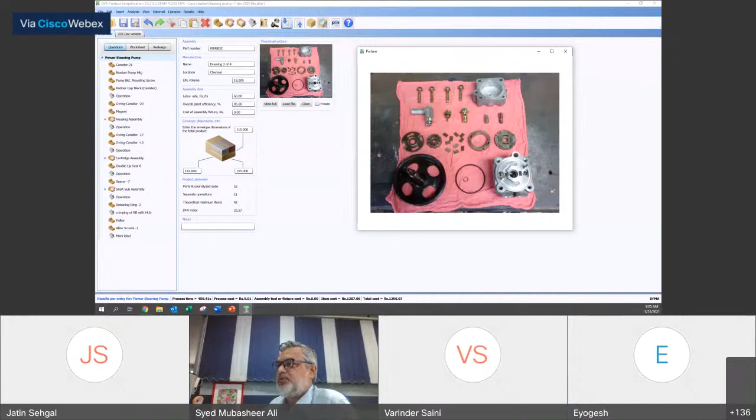This is something you could also do with the DFA tool. You could do it in an assembly sequence, and you can also do the disassembly sequence.

You would do disassembly when your challenge is, how should I service this product in the field? How should an engineer or service engineer disassemble and address a maintenance, warranty, or service problem.

During assembly in a factory, the tools, tackles, procedures, and steps may not be the same way a field engineer, mechanic, or technician would do it, and he may not have the same kind of tools to reorganize parts when he wants to disassemble and repair them. So you can use DFA to address both of these attributes.

This is option one I want to show you as part of the recap. Second thing I want to show you is, let's say if you had just a drawing...

Now, this is what I showed you earlier was a mechanical component. This is an electromechanical component. It's got sheet metal parts, a PCB, wire harness, plastic components, and so with a 2D drawing like this, you could also do a very decent DFA analysis.

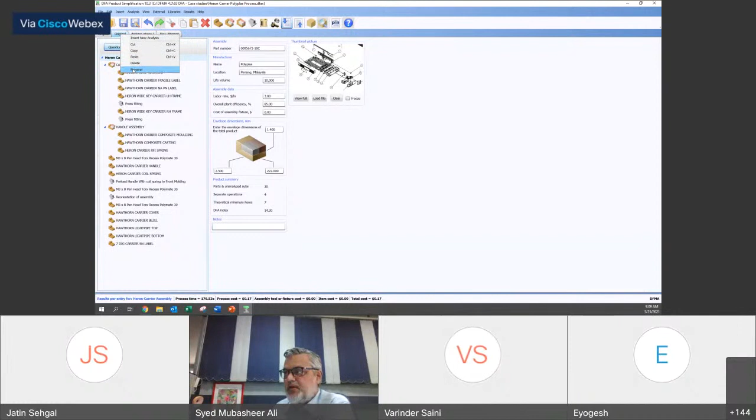I'll just do that in a minute. I'm going to make a copy of this, paste it, rename it, and call it original-dash-Ashwin idea. Maybe there's a possibility instead of having this as screws, we can rename this. I'm just doing my idea creation here. I'll double click this and say I'll make it an M3 size snap fit. I don't know whether it's a suitable thing, so I'm not going to have it as a threaded fastener. Maybe I'll do a snap fit operation with 3 snaps.

It's in my imagination now, but I do not know what the impact of this is. So I can do this impact analysis by going here, and I'll look at this process time. I'm just going to take the original and the Ashwin idea which I just created and look at them. Sorry, I need to regenerate the file. Dash 25 May 2021, saving this.

Okay, let me go and look at that. So what I'm trying to tell you is, on its own, it does not recommend iterations. It gives you feedback of your design intent.

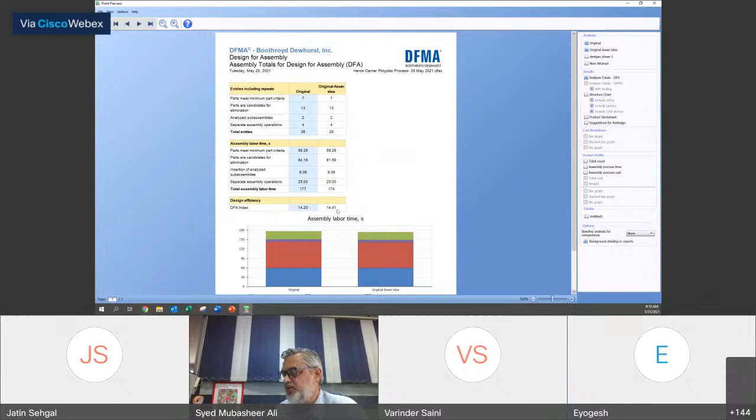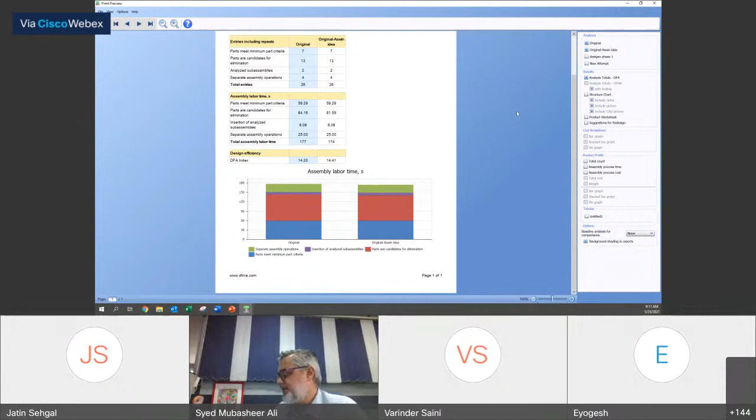Here, as you see, the impact of the old to the new, this is going to be your change of design iteration. So 177 seconds is going to be probably 174, and my design index is going to change up so slightly. What I just did here was, instead of a screw, I changed it to a snap fit design. So I can get rapid feedback of intent like this, which is what we could probably do.

Okay, two more questions before I go on to the session. Hang on, improvement - how can you do 2D drawing like that, sir?

With software? No. This 2D drawing image is just an image of the product. This will also be a drawing, but it does not read from the drawing. I'm just using this drawing as a reference of saying what file this product is. This doesn't read from a 2D drawing.

Sir, I have one question - what is the difference between disassembly order and assembly order? I think I already explained that. This assembly order is more on the factory level, which may be having more good tools. Disassembly order would probably involve having a full product where a subassembly is inside the product.

Imagine like a car is already available at the mechanic shop. He wants to access, say, the alternator. The access for the mechanic to the alternator in a disassembly is a disassembly sequence. He has to open the bonnet, then keep the bonnet locked in a standing position. He has to remove probably the front grill, then go and reach access. This is not the same sequence of the assembly when the product is built in the shop floor in the factory. So the challenges in a disassembly sequencing or removal of an item to reach it may be different than assembly sequencing of the same product when the product is built. I hope that answers your question, Mayank.

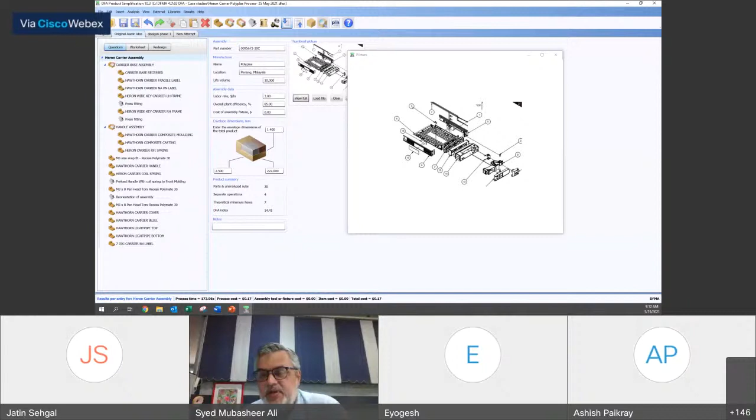Can we export component specification from other software? Yeah, I will show you that if time permits. Here we have an opportunity, like I said yesterday, that we can import bill of materials.

So you can import the bill of materials in a text or CSV format. I can even import Excel formats like you can see here, and we can also do text formats. We can probably give you content as a training manual which will probably have this information.

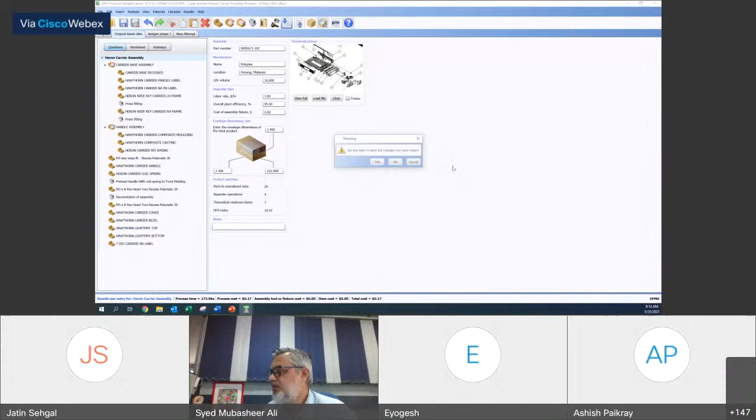And no. So just let me know if you can see my screen.

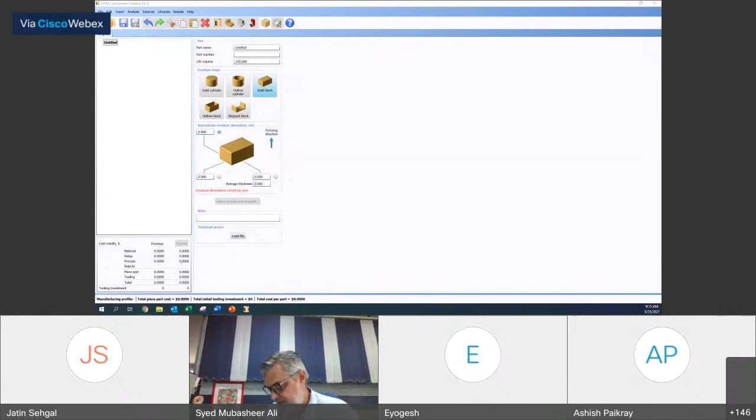If you have multiple systems, you can probably do this simultaneously, or if not, please watch my screen so we can learn from this, and then you have the PDF documents on this exercise. You could probably take it from there.

Okay, now I'm going to analyze one of our motor parts, which is this guy, this base part, as a component for casting.

Okay, so I'm going to give it a name. I'm going to do two approaches. One is I'm going to start out this exercise as if I have only a concept and do a quick analysis. Then I will take up a CAD model. Is that okay with you guys? So that I can show you both aspects of how to use this tool.

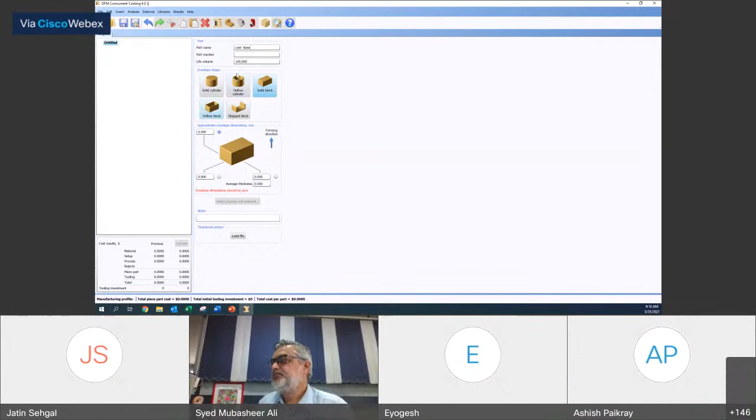So I call this the cast base part - sorry, base part - and that's the name. And the life volume, I just want to make a few hundred pieces. That's my objective.

Now, generally, the DFM tool is designed so that anybody from the conceptual stage design can be able to get estimates right up to the production engineer who may have accurate inputs which he can give to build his cost model. This software graphics user interface is designed with that in mind.

So just like we are in DFA, we give an overall geometry of our part as cuboidal or cylindrical. You can start out a DFM analysis by saying what is the approximate envelope shape that your component occupies. See my screen? What is the maximum dimension, and is it a hollow component or a solid component? This helps to do some internal calculations.

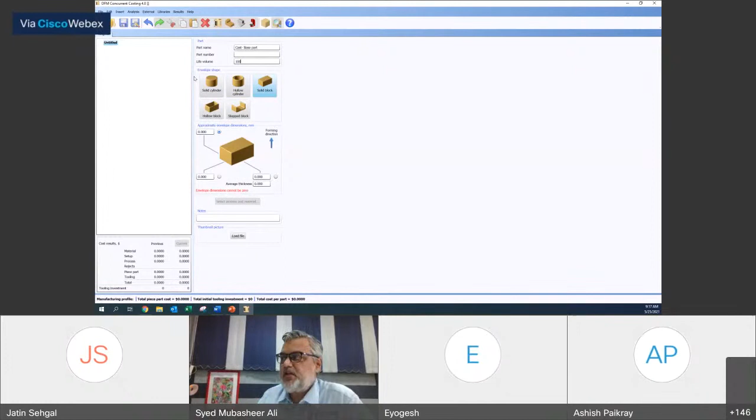Even if you don't have engineered data about your idea of the part, you can still get good cost estimates when you're doing conceptual work. Do you understand what I said? If you do, say yes. If not, you can ask for clarification, and I can get ahead to answer them. Great, thank you so much.

So I'm looking at my part, and I'm going to refer to this part again. Guys, do you have the dimensions of this part in the PDF, so I can use it for reference?

Just give me a second. Just opening up.

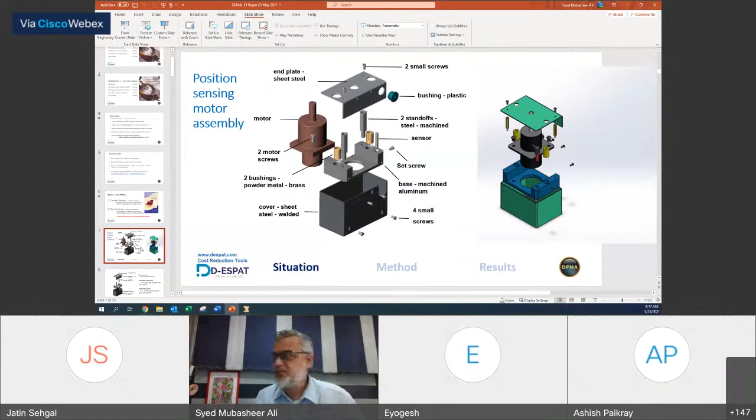Okay, I'll just take an estimate here from the CAD model. I'll come back to this.

So I'm going to assume the value for this base part. I'll say it is 25 mm height, about 70 mm wide, and about 100 mm width, and about 3 mm in thickness. I'm doing this at a conceptual level, and I start out with three important inputs in this first window: one is the life volume, your choice of envelope shape that closely defines what your component's final geometry is like - the geometry of your part - and an average thickness of that part.

I select the process and material selection window. This will come up. Now I can choose what I want as the particular process that I'm intending to make this with, and what will come up is these two choices on the right hand side.

Of course, your software will not have the Greaves project - you will have North America and China database. Now, why do we have this? This is a database that has been standardized over the last 3 decades. Where customers deploy this, they use this database and build their own customized, localized database for their own activity. We'll talk about that in a minute, but right now you could probably refer the default that you may have. Don't worry about these projects, Himanshu, that's my private projects - it somehow got copied here in my presentation laptop also.

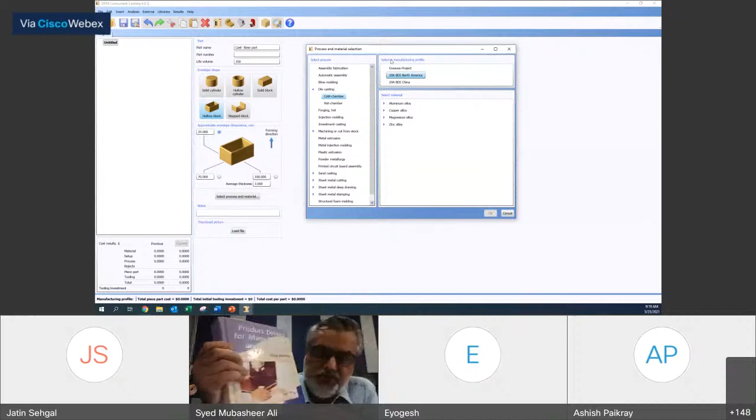BDI means Boothroyd Dewhurst Incorporation. BDI are the people - that's Dr. Geoffrey Boothroyd and Dr. Peter Dewhurst, the two folks who started this concept of measuring cost at the design stage. They are from the University of Rhode Island, and they started this measurement technique in the 1970s to help automotive and aerospace businesses measure cost at the design stage.

Today we have it in the form of a computing tool. This tool is over 36 years old, so that amount of database has been documented and standardized in our software. It's the number one methodology used by Fortune 1000 companies.

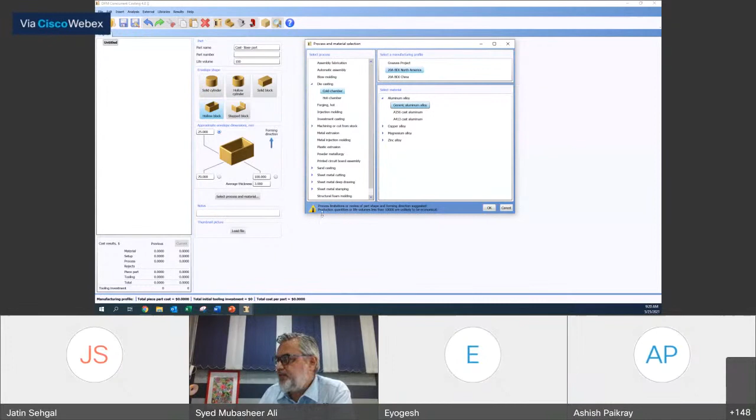Thank you, Janaki. So, die casting operation - let me select a material. When you make a selection that has certain limitations from a manufacturing perspective, it will give you recommendations, like here: you have selected production quantities less than 10,000, which is most likely to be uneconomical. That's okay, maybe I want to do an academic analysis here, so I'll say okay.

And what has come up now, ladies and gentlemen, is the overview of the process related to the combination you have selected. For a given geometry, you selected a process of casting and a material. What comes up below from the software automatically is this data - the process related parameters, the process machine that can be utilized for an operation like this. These are the list of machines right now, but it has selected the most ideal machine.

What the software will do when you give a geometry for carrying out a costing analysis or a manufacturing review analysis is it will go and pick up the most ideal machine. Why does it do that? Because this automatic selection is always on in our tool. Unless you don't want it, you can unclick this and probably select another machine.

For example, right now I can go and say change the machine. It will bring up all the die casting machines listed in our library. I can go and select some other machine. When will I do this? I will do this when, maybe in our lab, I don't have such a small machine - maybe the smallest machine I have is some other tonnage. Then I can click on that and use it.

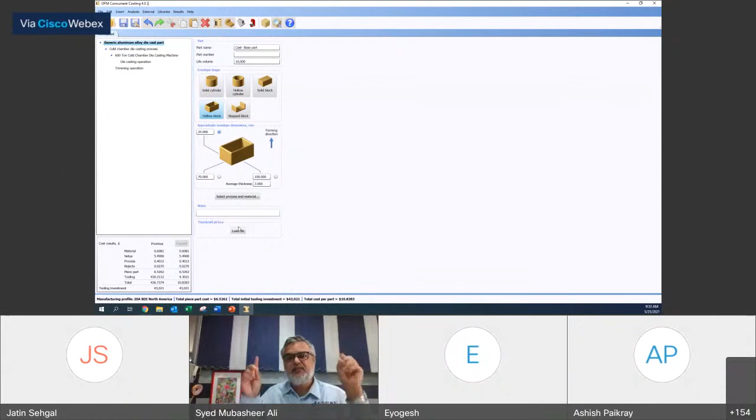So this impact of playing different what-if scenarios is what you can do with the tool. Do you get it? If you get it, say yes in the chat box. Okay, so use this tool. You know, gentlemen, what I'm giving you today, what I'm showing you today, is something.

If I was in an industry and had to work with a manufacturing expert, it would be very cumbersome to do these kinds of calculations, because he would probably be using some method or Excel sheet that only he is familiar with. Right now, we're doing all of this using a tool that has a standardized approach to solving such scenarios.

The next thing that would impact this is something called part geometry. Have a look at this part. Yes, we can do it virtually. Imagine this part - it's something like this. This side is 70, this side is 100. Just remember this.

Now I go to this part projected area. Are you able to see my video? If you can see it, say yes on the chat box. Now imagine this part - I'll come and show you this in the CAD model later. If I want to make this component, I'm going to ask you ABC.

This is surface A. Is this a good way to manufacture it? Or should it be manufactured like this? Or this way? What do you think - will it be A, the longer side B, or the shorter side C? A, right? Because this is a larger area, so it's easy to have molding along this axis, along this face.

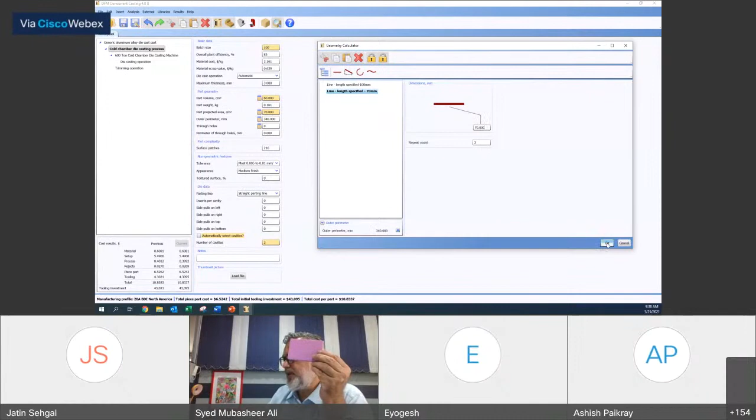Similarly, I have another one on the left hand side, the 70 mm. These are names that I'm giving in the file so it's easy for you to follow me. So that's a 70 mm line segment, and there are 2 such line segments. I'll say OK, and it comes into my software. Did you follow this so far?

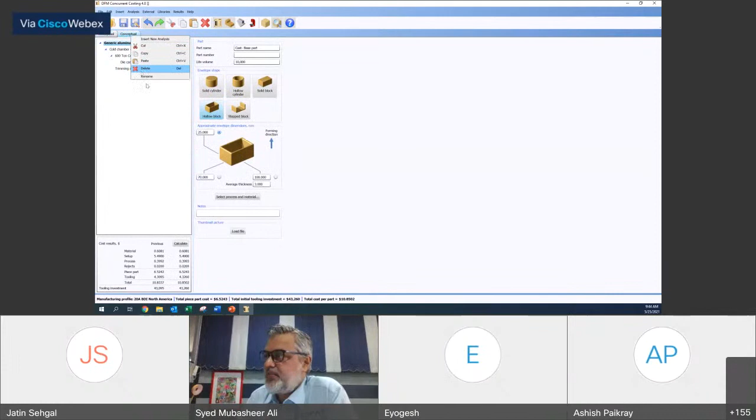Now this is a default setting from the database. I'm going to do this copy, paste it, and rename it as IIT Ropar for a minute.

What I'm saying here is at IIT Ropar, our labor rate or machine rate is not $60. If you know the labor rate or machine rate of the machine in your factory or college, you can go and build that. It is not $30 an hour in India; it's less than $2 an hour for skilled labor in India.

So when I do something like this, I can see how it impacts and adds up to the cost. If I make this using the US database, this was my cost impact. Because I changed the machine rate and the labor rate, you see the material hasn't changed, but the setup cost and process cost are slightly lesser because of my new labor rate, and this is my proposed new cost.

So if somebody says you have to work on a project and there's so much data to get, don't worry, get your idea of how you want to make your product, then go and build the details that you know about your enterprise.

Machine cost includes depreciation. So here's what I'll do to show you. Let me make another copy of this, paste it, rename it, and call it depreciation.

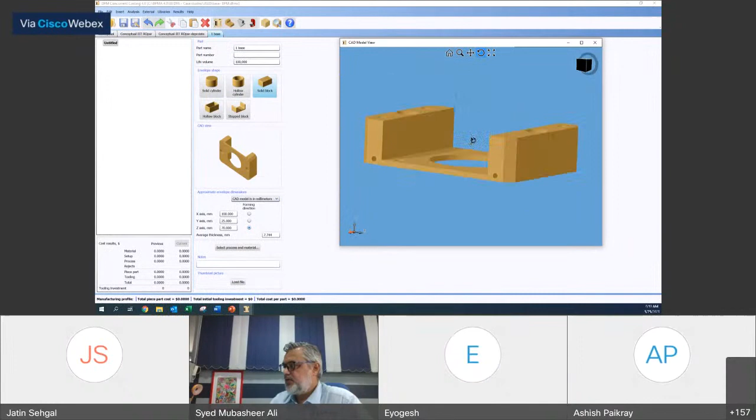I hope you pay close attention to what I'm showing here. We're going to talk about these. So this is my CAD model in an STP format, which I've imported here. Now I have a question for you guys: can you see the coordinates at the bottom, X, Y, Z? Which do you think is a good way to cast this component - in the direction of X, Y, or Z?

Y, correct. So this is more feasible from a casting perspective than compared to the other two directions.

So what I'm going to do is when I import a CAD model, watch this - the CAD model's overview geometry automatically comes into the software. What you do have to do as a choice is select the envelope shape that closely represents your geometry. Watch this, you see here forming direction. If I select a hollow, I get a principal axis. If it's a solid, I don't get a principal axis. So this is a choice which the software will come up with. Make sure you're having the right choice made depending on the geometry that you have selected.

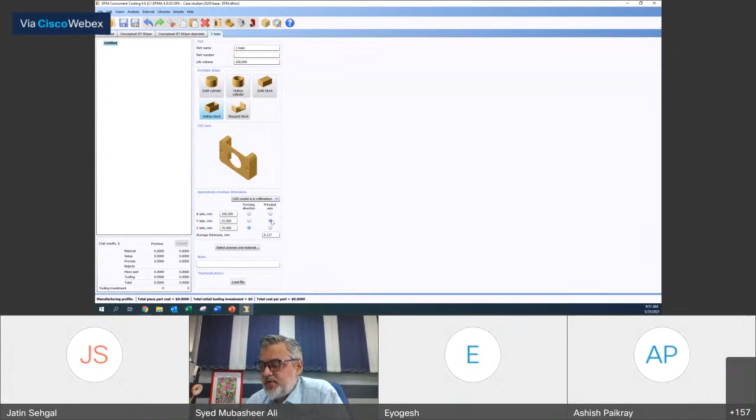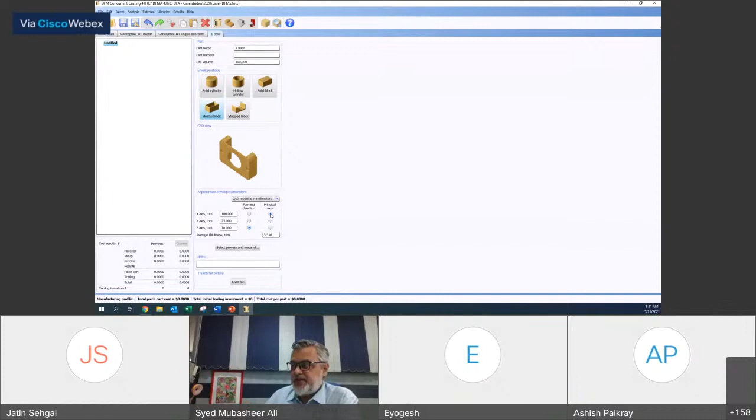Now, another thing I'd like to point out is as I select the direction of forming, I want you to watch the average thickness. Now where are these numbers coming from? This number is coming from the CAD model whose data has been transferred into the DFM tool through this STP viewer software. So in the direction of Y, the software is able to measure an average thickness of 6 mm. In the direction of Z, it's about 5.7 mm. In the direction of X, it is about 5.5 mm. Nevertheless, our direction of forming is going to be Y, and in this case the axis of forming also is going to be Y.

Now, when I do a CAD import, this is what I should take care of: quantity, and the right envelope shape that closely defines my part. This is your actual part. We are a component centric tool, you're a product centric tool. Here, you don't give the geometry of the part - you give the final geometry of the part. That's what you give here, and that's what has come out here also.

Now I select the process and material. Now I select the same process for the same geometry, and say OK. The only difference between my previous one and here is a few things. One, if you remember, white color means default, yellow color means the user is giving information. But if you go to the CAD model generated, orange color will come there, which means the data has come from the CAD software.

All right, let me take a minute and answer some questions from the chat box. Is there any limitation in the CAD software, or can we import it from any other software? As long as it is STL, STP, IGS format, you can import - step block would do too. You can explore whatever you want, Abhi. Can you import CAD files? Yes, Mridula, that's what I just now showed you.

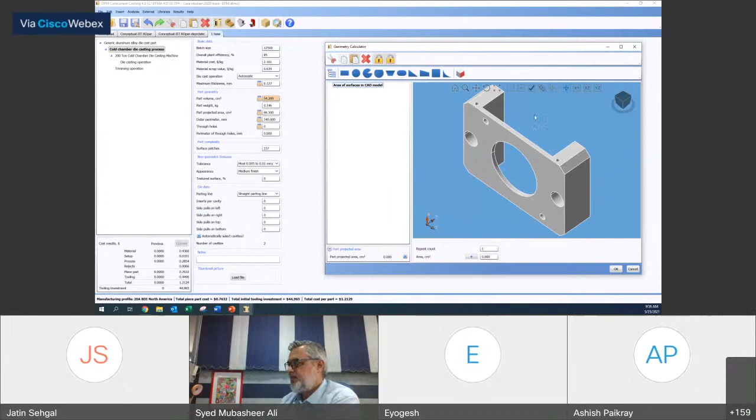Right now, what I want to do is find out what is the projected area in the direction of forming. You all told me that y is the direction of forming, right? Y or negative y is the direction of forming. Correct or not?

What I can do is put this face up, and if I go and select this geometry, the face of that area is calculated. I can bring that into my analysis like this. So this is my new copy, and if you see, it is showing orange color, which means the software has picked up this value from the CAD software, and I'm making my prediction a little more accurate. So what was $1.21 is about $1.18 now.

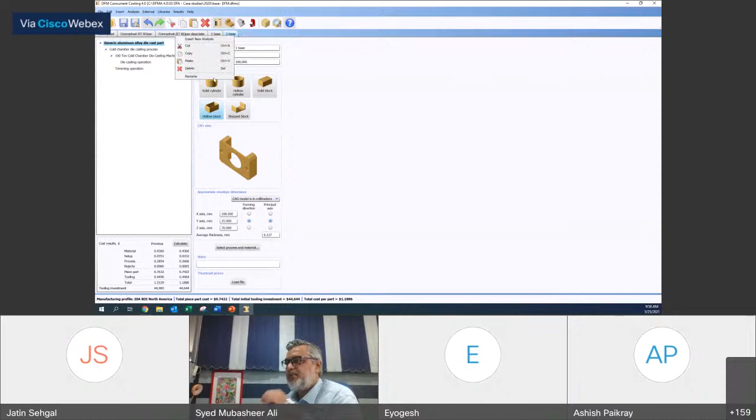Let me make a copy, paste it, and rename it as maybe improvement, so I have multiple files showing the same thing. Again, for perimeter, like you said, you wanted to capture the fillets and other features. I can use this geometry, build the geometry here, or use the CAD software to help me capture the perimeter.

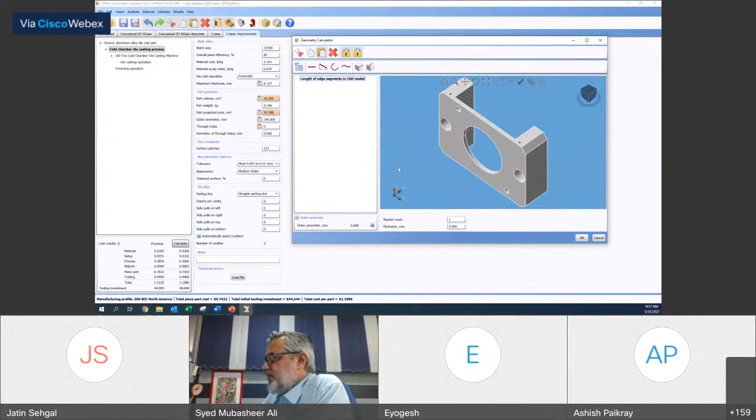Let me orient the part, and I can select using this. Let me show you all the options I can use on this geometry calculator. This is one way of doing it, it is capture. Okay, let me remove it out, or I can select a box.

But in this case, I don't need these circles, so these do not contribute to the perimeter. Perimeter means only the outside, not these features. So I can go and say negative and pick this result.

Actually, the center hole is called a through hole. Okay, let's focus on my presentation. We will come back to your questions a little later.

So there are different ways you can use this tool. I'll just repeat it one more time. This is removing every selection. This is picking up every selection. This is picking one by one.

Okay, this is removing selection, this is box selecting, unselecting. Get it? So these are the icons that are there.

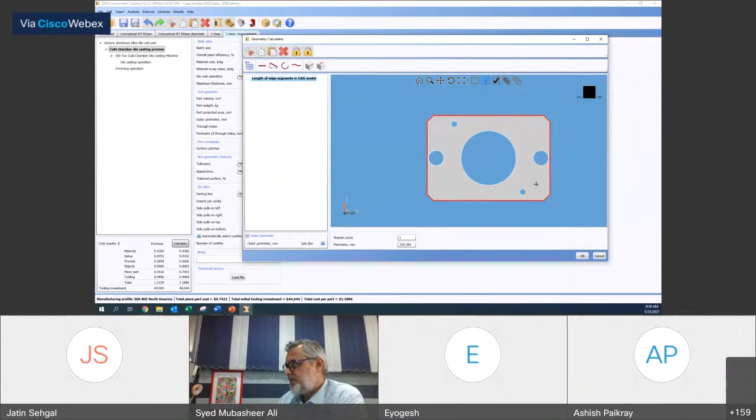Right now I'm going to do a quick pick like this. This is my perimeter capture, and I don't want these. Sorry, I messed up this guy. So I'll take the tick box selected, and my perimeter is captured. So this perimeter capture is now transferred into my DFA calculation.

Remember that big part that we saw here, the component feature like this. There are two ways to make this part. Maybe I'll take another 5-7 minutes extra if you don't mind.

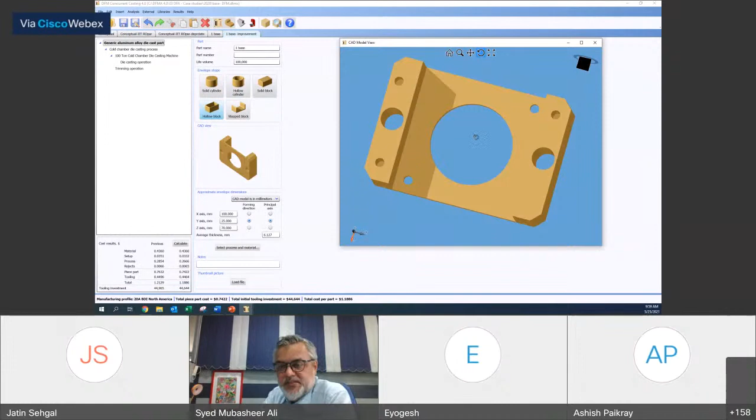One option is I can make this as a part of the casting itself. If I make it as a part of a casting, then this will be called a through hole. It doesn't matter which selection you pick - if you just select one of the Y, the mold has to go Y and negative Y only. There's no other way it can probably move.

Okay, look at this, watch what I'm showing now. You see this trimming operation? Look at the number of features here. 1, 2, 3, 4, 5, 6, 7 items are listed here. Remember that, 7 items are listed. I'll show you why it becomes more or less, I will let you know.

Now, do you agree that we have a through hole in our model, the central big hole? If yes, you can do two things. You can type it, and you can give the dimension if you know this. Again, ladies and gentlemen, what I'm trying to show is there doesn't have to be one way of solving things. If I know something from my CAD model, I can even type it here. That's what I'm doing.

You see, I've typed it. So what I've typed is yellow colored user input. What I get from the CAD software is orange inputs. What I have as white is default inputs.

Okay, but I'm not satisfied giving this one hole, which I've typed out. I want to get it from the CAD software. No problem, I click on the geometry calculator. I use the geometry calculator, I use this read feature of the CAD model from the geometry calculator, and I will select that.

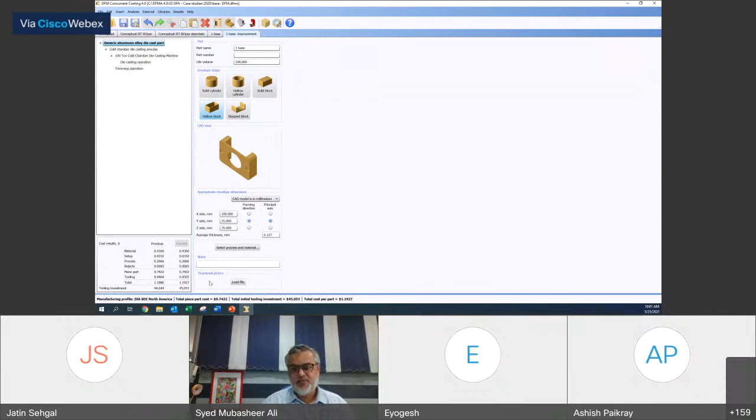So to give a nutshell of my last 45 minutes of presentation of this part: if I look at the conceptual stage, I had an idea of the part, I thought it was going to be 70, 100, something like that. I used it to build my costing, and I kept on improving it. Then I had my engineer who did the CAD model, and I have the improvised version. So you see, this is going to be my cost of this component.

Again, if you look at the conceptual design cost, it was $10. In the IIT Rupa case, I changed the machine rate, I localized my cost internally. In the IIT depreciated version, I made it much better because in 2021, I know my vendor's cost is not $10 a machine, it's now $6. Then I actually got the engineered component from my CAD team, my design team. So from $10 to $1.19.

This journey - if I didn't have a DFM tool for a component like this, I have seen companies spend 8 to 12 weeks. We've done it in less than 1 hour. Imagine when people like you, working in teams, have this at your disposal, you'll be doing it in minutes.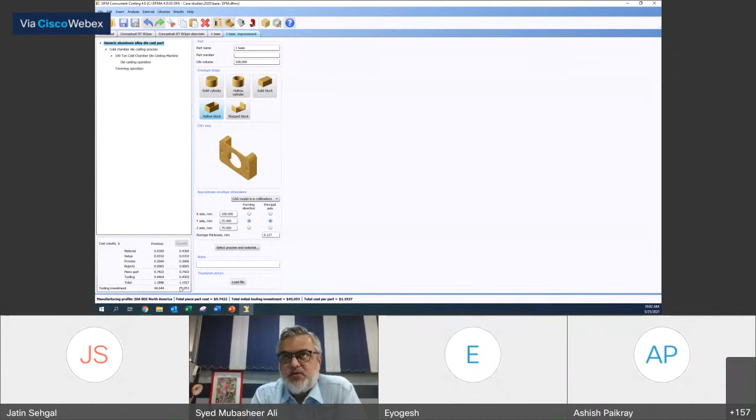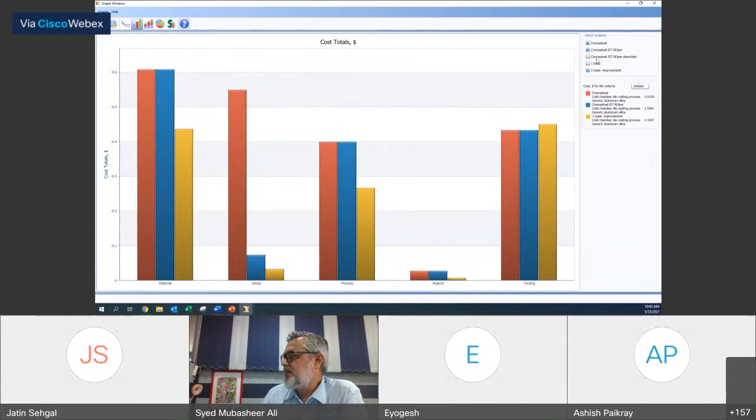So we'll spend the next 5 minutes answering some questions and looking at how our concept to different cost comparisons look - I'm able to see all of this on a dashboard. I can see what the profiles are for different volumes and figure out how the impact is across different volumes. So let's answer some questions over the next 10 minutes.

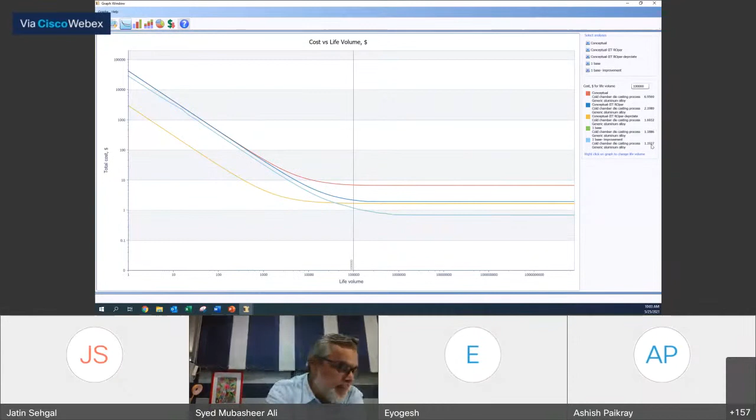So when a company goes to manufacture for a product, in the molding cost, tooling cost, time for production - are these borne by the company or manufacturer? Depends, Himanshu, these are different business decisions. Sometimes the vendor would say, I will only give you the part, I will not give you the proprietary mold. So it is a decision.

Do we as a company also have to reduce one-time cost? Nothing like that, it depends. If you want to own the intellectual property of that mold, you would not want to do it.

Sir, can we have these project files? It's already given, Kunal. The project files related for training has been given.

If you're increasing the number of cavities, the machine time is optimized. But then why is the tooling investment price increasing? Of course, right. I want to make this part. I have one cavity in which I want to pour the material and make the casting. Now you're going to increase more cavities. You have to machine that cavity in the mold, right? So molding cost, the molding tool, all of that will add up. That's why the cost increases.

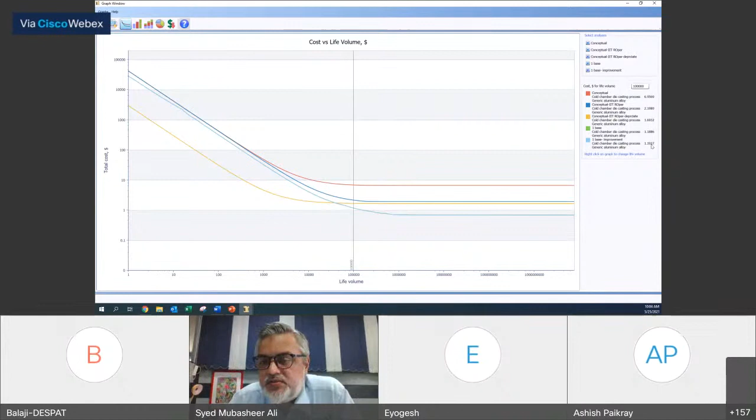Sir, about increasing number of cavities, machine time optimized, I'm a bit confused. Avantika, I hope I explained to you now. The other holes doesn't count as through holes. Great, good question, just hold on for a minute.

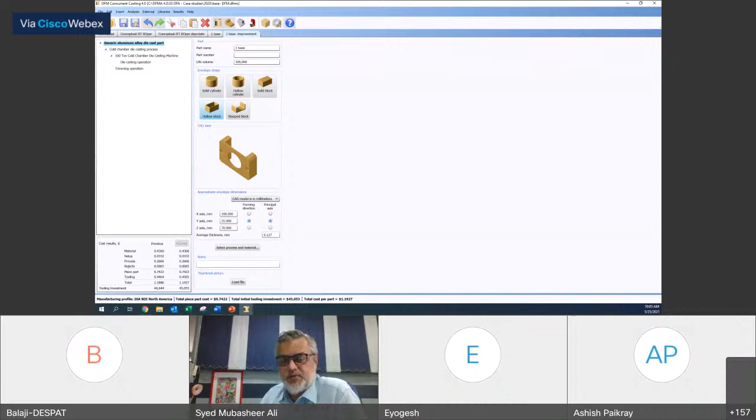That's going to take another 5-10 minutes to finish this. So here's what we're going to do. Good question, but that's going to elongate our time. But I think that should be okay. The question which was...

That other holes, Praneeth is asking. See, when I make a part like this, what I actually did was about casting this part and this through hole. Component parts like this, if you remember our video, this is actually a through hole for putting the fastener. So I've actually drilled this hole and then put the tapping. Even this feature, for example, can you see this small hole here?

If you remember, if you have the video, you can play it. The sensor sits over here and the sensor set screw is put here. So the sensor set screw is put here. You actually have to drill a hole. You have to tap the hole.

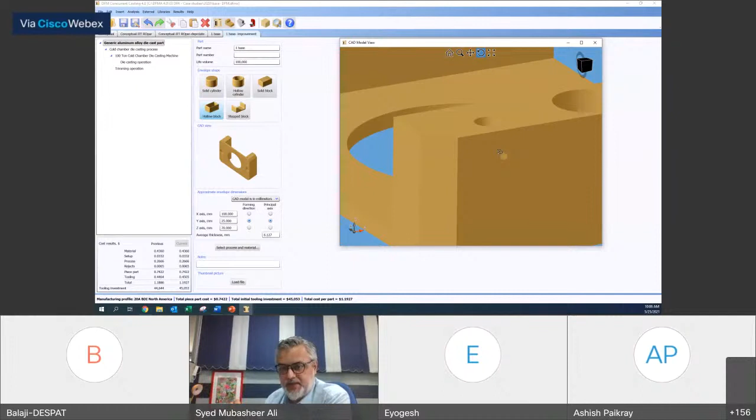So just for the interest of learning, can I just do this one hole for you guys so you'll get a feel of adding an additional machine tool and doing an action? Can we do that? 10 minutes, we'll spend doing that. This is critical for your success. So I'm just going to do this one small hole and I'm going to use the CAD software to help me with the data that I want. Right now, watch, I'm going to say...

Now, are there only 8 machines in our library? No. If you look at our library of machines under this manufacturing profile, look at this, these are a list of machines. And each machine, sorry, each of these machines has subcategories of machines, each of them having at least 10 to 15 subcategories, yes, some of them even much longer. Then why in the world are we only seeing 8 machines here?

8 machine families here. It's simply, ladies and gentlemen, as I said earlier, this is a knowledge tool. Correct relevant tools that can be used after a die casting process are the only ones that are available for the engineer to access. That way, it also prevents human oversight and human error of picking up the wrong machines to do their actual task.

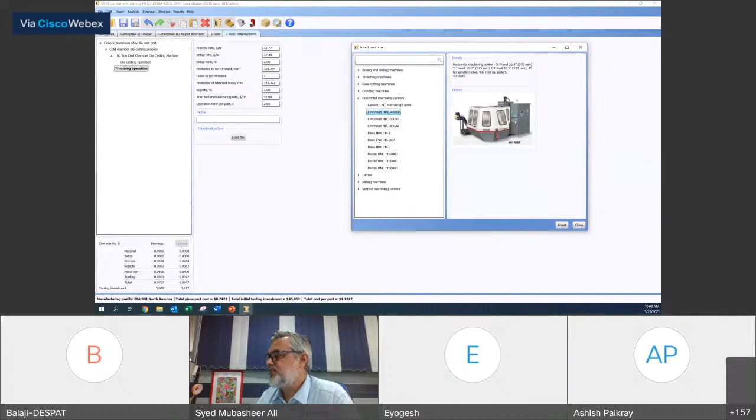Okay, I wouldn't call it optimize. I would call it the right set of process to be followed post initial primary process. This is your primary process. What I'm going to do now is my secondary process, wherein I want to drill a hole and tap that hole. So let me just take arbitrarily one machine here, our machining center. So when I take this machining center from the library of machines, this machine's data comes into my analysis.

So this machine, its labor basic data, its machine hour rate, its kilowatt hours of the motors that are running, its spindle speed, all that is estimated, which is part of the library, comes here. Along with that also comes the cost for doing setup, loading and unloading. So if you have a different type of holding device, click on it. You'll see the different types of holding devices you can have, and you select it. The impact of that also is highlighted here.

If you have a job that you're going to do, and if you foresee, if you're watching my video, that you're holding the job on one type, you're going to do some activity, then you have to undo the job, reorient it differently, continue the activity. Then you will say reversal is there, and the reversal is calculated. So if you have multiple reversals, the impact of reversal is also calculated. How cool is that? Because many times people miss out this time spent where the operator has to unclamp a part, reorient it, do measurements before it is right, and then start doing the continuation operation. So details like this are also captured in our tool.

No, there is no 3D printer in our thing, Abhishek. We have not, our principals haven't standardized 3D printers yet, so we don't have it.

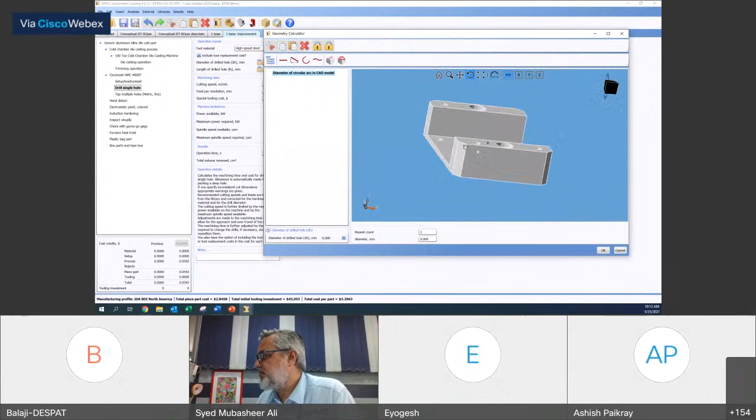Diameter, and I'll say which diameter I want to measure. I can go to that particular small. Can you see this? I'm going to select the diameter of the arc, select that and say OK. It is directly got it. It is 1.5, not 2 mm.

Mr. Syed, it is wrong. Syed just got an arbitrary input. When using the CAD tool, I got the right input. Similarly, the depth of that hole, I just put arbitrarily as 10. If I use the CAD tool, measure from the software.

Let us go to that guy. Do you see? So how intensely, how accurately you want to make the estimation of your tool depends on this. Let me just show you that I've selected it right.

The depth is hardly 2.8 mm and not 10 mm. I would like to pause and tell you sometimes what happens is at the conceptual level, a design team would say it's 2 mm laga lijiye, 10 mm laga lijiye yahan pe, and continue the exercise. When it comes to a production guy, he would take the soft model and edit it to be accurate. So this was the old estimate of what my design guy did, and this is an accurate estimate of what the production engineer did.

If you can imagine, this tool can be used by someone at the conceptual stage, someone in the design stage, someone in the engineering process order stage, someone in the manufacturing stage. The same file can be spread across all of these people. It's not just a well-curated software, it's also a well-curated demonstration. That's how we get the idea across. This is a very, very vast tool, and you can do wonderful things with it.

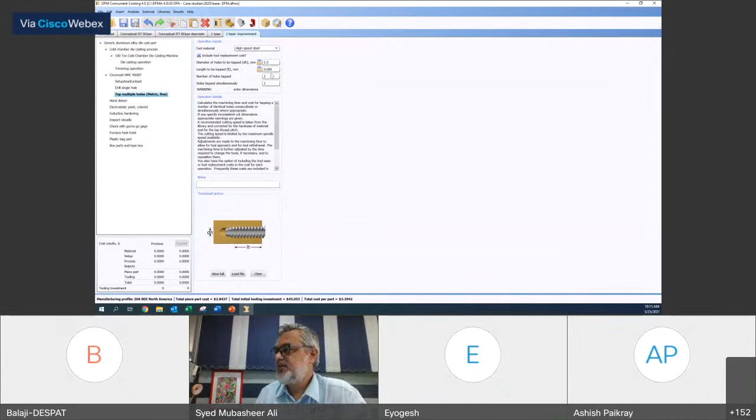I'm going to copy this data from the previous example, and I'll say 3 mm, and we get it done. You can go ahead and play with this, and let's get started with the sheet metal module. I'm going to stop sharing my screen, but I'll be live.

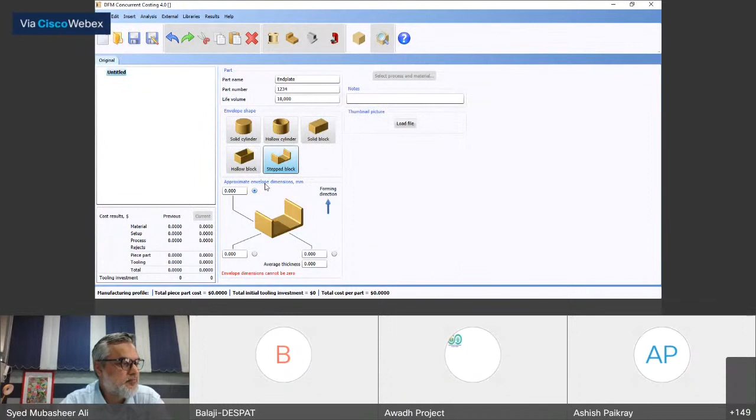First, part name we have to give the Endplate. Part number and life volume as current in the PDF, it will be like 10,000 — please type 10,000. So the envelope shape will resemble a step block, so please click the step block as envelope shape. Before that, I request you to set the analysis units to metric, and please use this as the default option for all subsequent analyses. Then click OK. So if you see the PDF, the three dimensions will be X, Y, Z, and we have to fit the values into this envelope dimension.

So we have chosen the envelope shape and we input the envelope dimension. So we can select process and material. If you see in the PDF, the material is chosen as low carbon steel and the process is turret press.

So under select process, just go for sheet metal. If you go for sheet metal, there will be sheet metal cutting, sheet metal deep drawing, sheet metal stamping. Just enlarge the icon of sheet metal stamping and click the process turret press.

It's loading. We can go with BDI North America as the default standard database, and we can choose according to the PDF, like low carbon steel, cold roll commercial quality. So the process I will choose is turret press, the default manufacturing profile is BDI North America, and the material is low carbon steel, cold roll commercial quality. Please click OK.

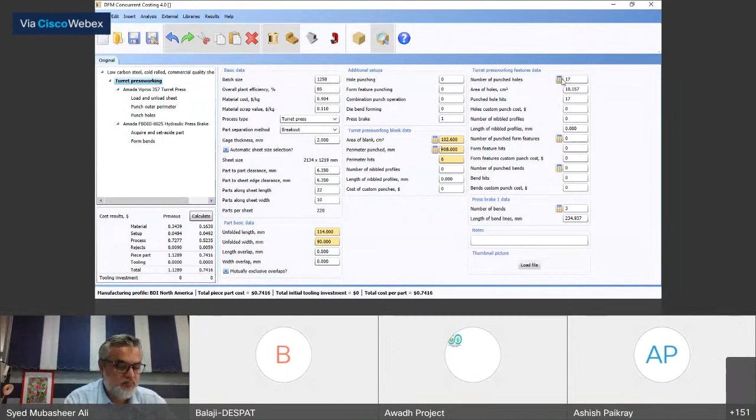So as Mr. Sai explained earlier, with a CAD model we can import and take the diameter of a hole. Now we don't have a CAD but a data value. Through the PDF we can see and get a value. First click the option called circular hole.

For namesake, please type, for your clarity, diameter 15. If you see in the PDF, there will be a diameter 15. The holes will be...

4 holes will be there. And circular hole diameter 6. So diameter 6 mm, and 2 holes of diameter 6 mm are there, so repeat count will be 2. And repeat the step again.

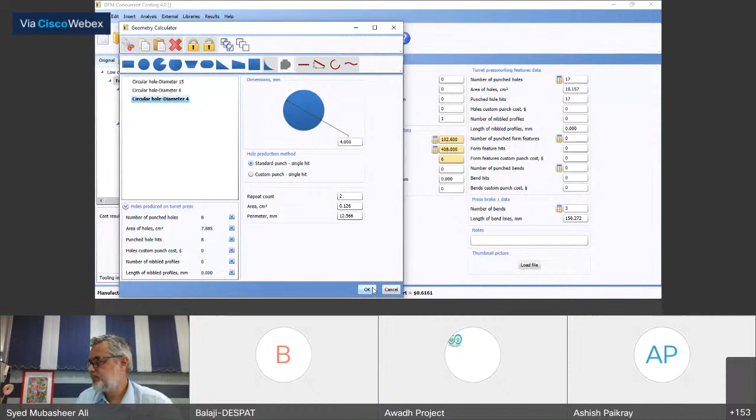Now I choose the diameter as 4 mm. So 4 mm diameter I have chosen, with a repeat count of 2. Just click OK. So there will be 8 holes total in the PDF.

And we can go for press brake data. There will be an option called number of bends. You go for the geometry calculator and click this bend icon.

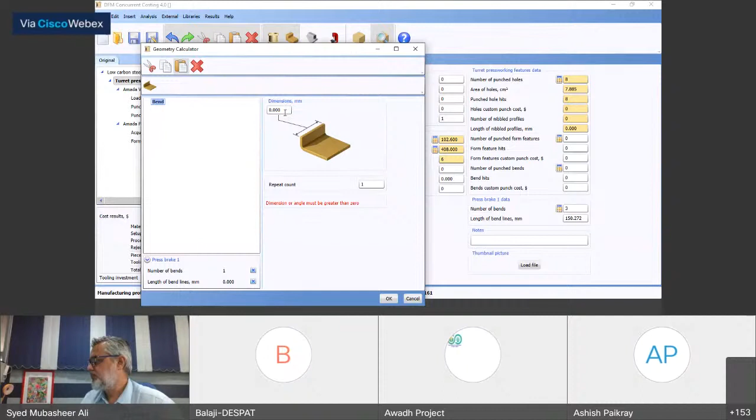That is asking for the bend dimension. If you see the PDF, we have to select the length of the bend line. So the length of the bend line will be 114, with only one repeat count, since only one bend is there.

So please click OK. Balaji, hold on please, I think they haven't shared the PDF yet. Can you please show the PDF file once again for their clarity?

This is the PDF. What I've worked with: 4 holes of diameter 15, 2 holes of 6 mm diameter, 2 holes of 4 mm diameter. So the diameter of the holes which have been punched have been taken, and this is the unfolded length, 114, has been taken, and the unfolded width, like 33 plus 57, we chose as 90 mm.

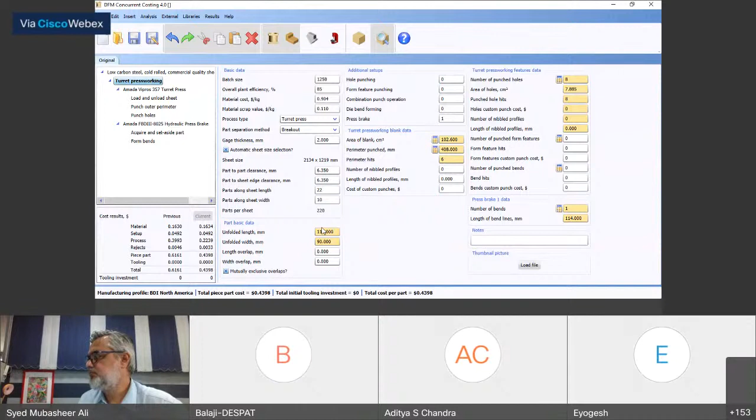Under turret press, I've given the unfolded length as 114, and unfolded width as 90 mm, which is 57 plus 33, giving 90. Then area of blank.

If it's a CAD model, it will directly import the area of blank and show it in orange color. But since the CAD model isn't available now, we go for the geometry calculator, and we've given 2 rectangular areas.

Select these 2 rectangular areas. One rectangle has length 114 and width 57, with repeat count 1. Another rectangle area is 114 by 33. So these 2 rectangles comprise the area of the blank.

Next we go for perimeter punch. Perimeter is the outer area. In the geometry calculator, we've selected 3 lines. The first line is 114 length, repeated 2 times. Another line is 57, repeated 2 times. And another line is 33, repeated 2 times. So this totally comprises the total outer line of the part.

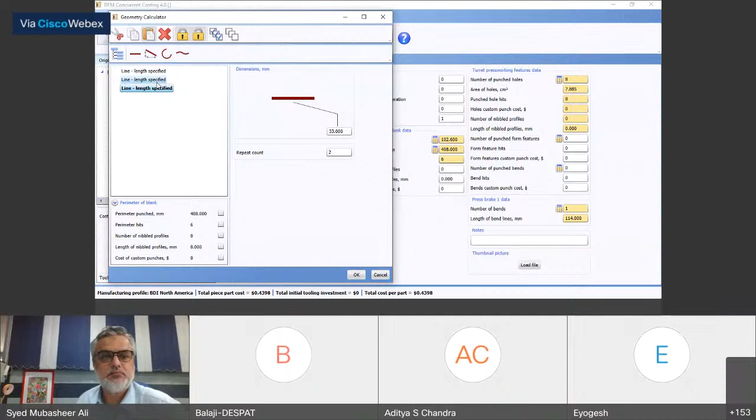That's okay. Balaji, can you put back the PDF for a minute? Show the 2D drawing and the expanded unblanked dimension, and use it for explaining, Balaji, so the team can follow.

Do you have the unblanked drawing? No, sir, unblanked, not available. Okay. You'll follow what Balaji has done, right?

Understood? Super. Everybody understand? We're good to go. Yes, Balaji. We have a super team here who's really fast with understanding. Awesome. Yes, Balaji, please continue. Yes, sir.

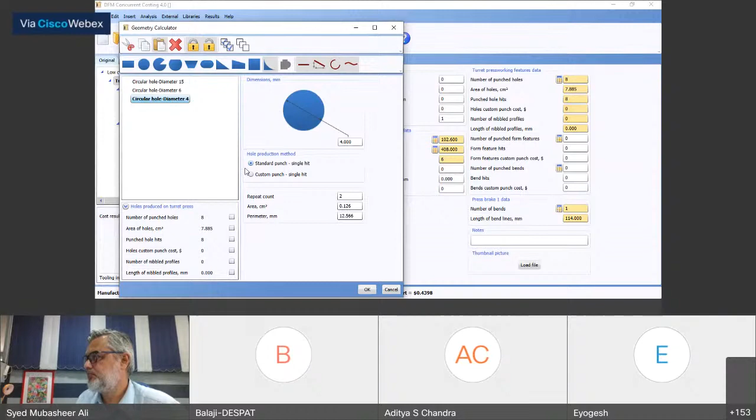So 8 holes total. And if you see the PDF, there will be one bend. So the number of bends is taken in the geometry calculator. We have to define the length of the bend line as 114, and give OK.

So these are the steps for the sheet metal primary process, and it gives the total result. You can view this result in the executive summary.

Just wait for a second, it's loading.

Balaji, are you showing your DFM file? Because I'm seeing only a PDF here. Is it only for me or how? Yogesh, are you able to see Balaji's screen? Yeah, only his PDF screen is visible now, sir. I think, Balaji, only your PDF has been seen for the last 2-3 minutes, man. We're not seeing your DFM file. No, sir, not yet.

You want to repeat the previous part? It's now visible, sir. Only now it is visible. Yeah, maybe you want to restart from where you left off in the last 3-4 minutes. Okay, okay.

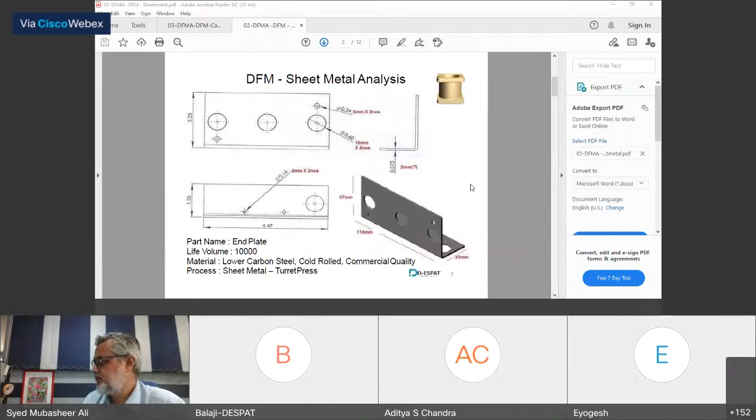So yes, sir, we can do that without PDF. With the PDF, the sheet metal analysis is finished, sir.

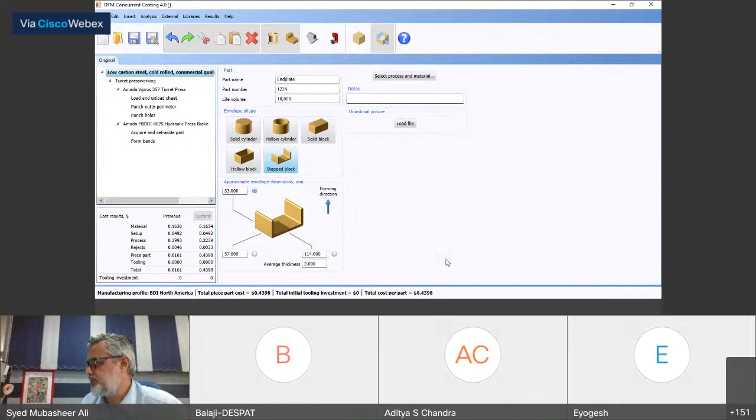Are you going to show the 3D model? No, sir, no 3D model. Okay, so what you do is stop sharing.

Can I be given the option to share, please? My screen.

Yes, Mayank. If you have a model built with bend allowances, you can consider it. Yes, you can also do a comparison of the same process with a different machine.

You can make a copy of the analysis and do that. Yeah.

Am I allowed to share my screen? Yes, sir, you can share the screen, sir. No, you are saying that, but the Awadh Project people have to give it to me yet. Yes, sir, you can share your screen. It's present, but the share is still not highlighting for me. Let me check again, Sundar. I'm still not getting it. Just a minute, sir. Sure, sure.

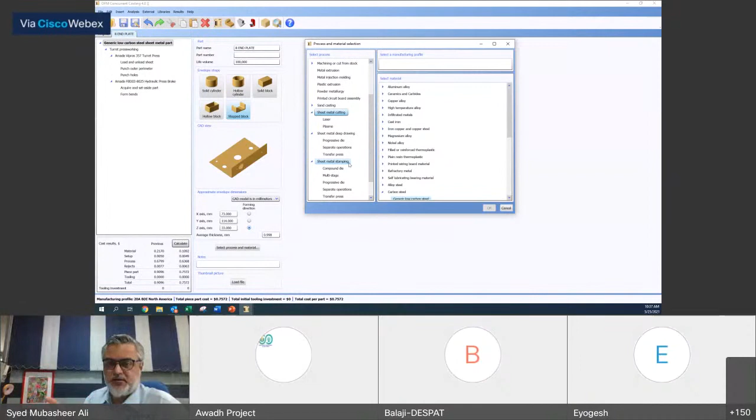Then when you select the process and material, you can select any of these opportunities for doing the sheet metal process. Just for the interest of variety, I'm going to change from the turret press I had here to maybe a laser cut process, and low carbon steel as the component, and say OK.

So here again, you already know how to look at this basic data and the impact of this on costing. Let's go look more at the geometry part, which is to make your predictions more and more accurate.

So the area of the part, if I click on it, like Balaji showed earlier, you can use any of these solid modeling support tools to generate your model. Or since we have a CAD model here, we can select the CAD model to be brought in and help us pick up the right geometry of the part.

So the geometry of the part would probably include this area of the part and this area of the part. I've captured that here by clicking on it, and I say OK, whatever is estimated here will come into my analysis. Similarly, for the unfolded length...

In this case, it is. So if you unfold this part, this length and this length will contribute to the unfolded length of the blank sheet metal component. Do you follow that?

Hello? Where am I? Right.

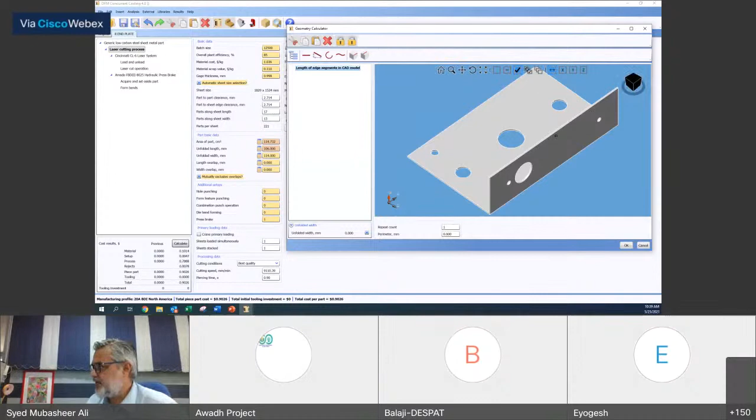Probably this part of the component. So I'm going to select that, and select this, and say OK. And when I calculate, I have this estimation made here.

Now if you look at this right-hand side, the process related details, you can actually build more and more into your process steps, especially in this opportunity of sheet metal with the laser cut processing.

If you want to put additional steps to do some other activity, for example, right now I've got one press brake here. If I make this a zero and calculate, you see the press brake is gone from the process sheet.

So at this level in the sheet metal process exclusively, if you type in options here, those many machines of those capabilities will be brought in and listed under your process sheet. You follow?

Okay, now you just selected a press brake here because we have one bend to do. So where is that bend? Let's go and get it done by looking at other data available here. For example, I have to give the perimeter of this component for cutting.

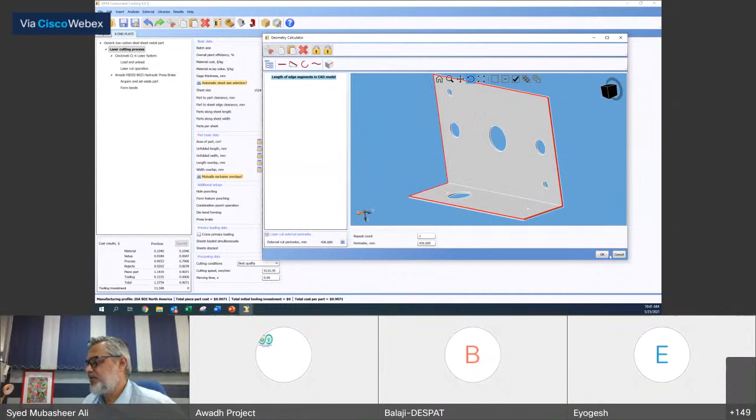Because you selected that, it becomes better. Your prediction is much more sharper now. Let me make a copy. Let me make a paste.

Let me rename it. I'll call it production department. I'm just doing a role play.

Okay, there are not 20 holes here. There are just a couple of holes that are going to be made. So I can go select this.

So somebody asked a little earlier about repeat count, so this is a good opportunity to know about that. If you see here, I have these two holes of one dimension, these two holes of one dimension, these two holes of one dimension, and these two holes of one dimension.

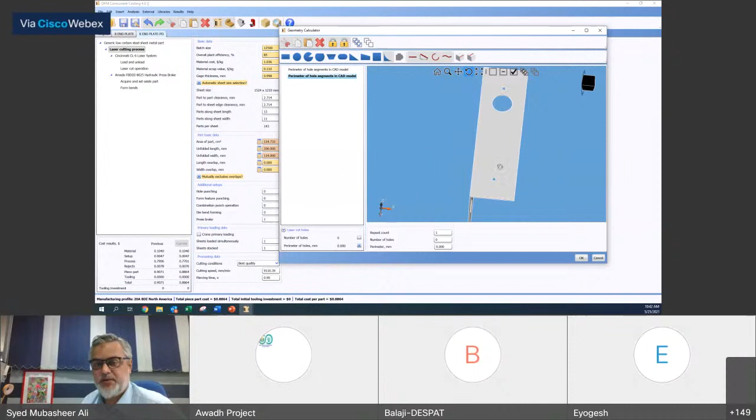You get it? So I'm going to use this on geometry calculator support and say this is a perimeter, right? So I'm going to say perimeter with this, and I will say how many number of holes. I'll say 2 over here. I can add another one.

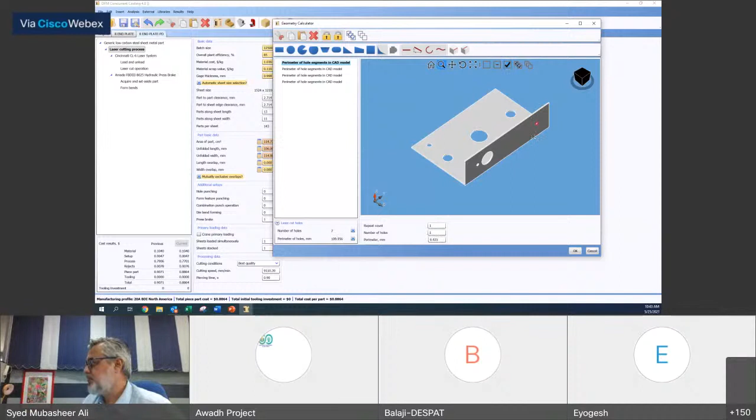Sorry, select this. So on and so forth. And this is the last one. Right? And 2 such holes.

So this way I'm capturing all of these holes, and I see all the 8 holes are captured here. Can you see it? So this is about holes. What about repeat count? What does repeat count mean?

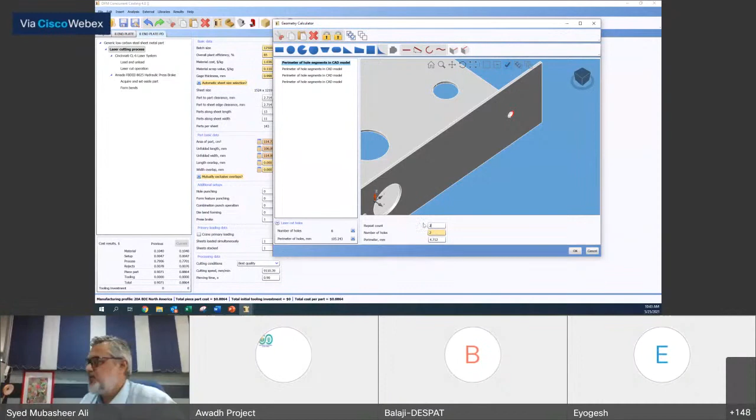So I could have done this like this also. For example, I can undo this other arc. And if I put repeat count 2, it will still capture. So I'm putting one portion of the arc and saying I have 2 such repeat counts. So that is the difference in how you want to build your hierarchy or capture this data.

Sorry, this is wrongly picked. Okay, got it, super, very smart, very nice. And I'm going to say keep this as repeat count 1 and 2. We're good to go. So 8 holes, perimeter is captured. Calculate, see the estimate. Better estimate.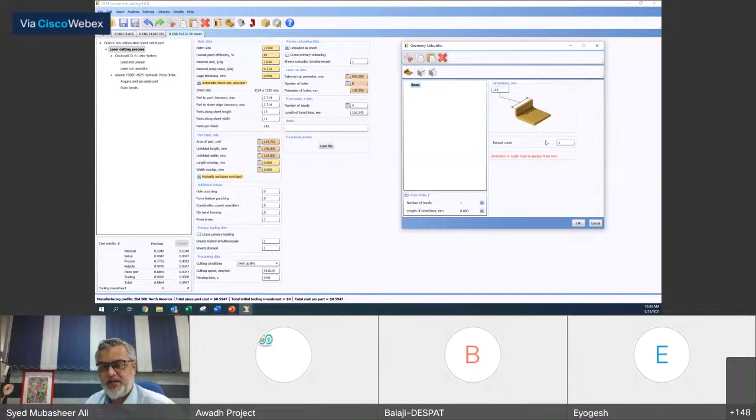There are 2 ways I can give the bend. I can just click on this bend icon here and say type in a value and say 114. That is the length of the bend of the part, if you remember. I could do that, I could input it this way, I get a yellow color faster. No, I'm very keen on doing it accurately.

Then let me remove this. I go to the CAD import support and I will highlight the bend. Where do you see the bend? How many bends do we have here? And which is the bend length?

Which is the bend length? This line, right? So I select on it, whatever is the measured CAD model, it will pick it up and then say okay, and I will get it inside. So you have different ways of doing this. There's no one way of solving a problem. If you know some answers and it's faster than capturing from the CAD, please go use an input, user input.

Okay, the only thing is it depends on how quickly or early, or how much of data you have at your disposal to solve such things. So what I've done here again is right from imported model to a final review, I've done this in a stage-wise manner, and I've got an overview.

What I like to show you, which also Balaji was highlighting, is we have several different types of reports that you can generate from the software. Depending on what you want, you should probably explore this to find out the different reporting options.

The reporting file has gone and hid itself inside. Here it is. Okay.

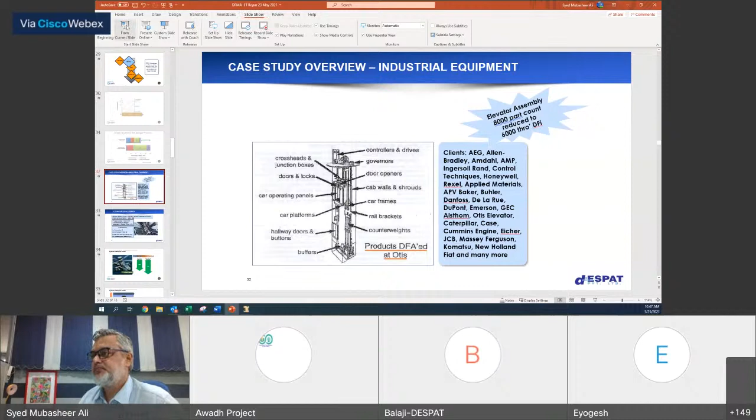So, these are some of our customers.

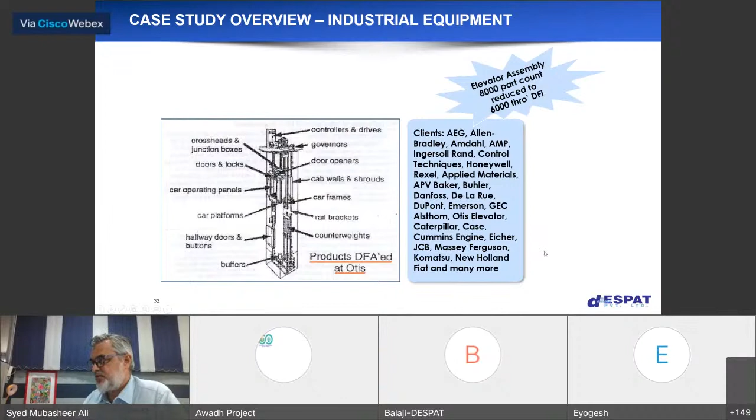Here are some of the names of different enterprises across the world that use it in this industrial equipment space. We of course did a project for some customers.

You know what was the challenge we got? The challenge was, hey, I want to make this electrical system in our elevator. It's a 639 parts assembly. Our challenge is we are not able to decide whether we should make it in the USA, where our parent company is, should we move it to our neighboring country, Mexico, or should we push it to our vendor in China? This is the decision they wanted to make around a product assembly that they wanted to analyze.

Look at this product. Do you know India has bought this equipment recently? This is an Apache helicopter made by Boeing.

Now, even after companies have launched their products, they are consistently looking at opportunities to find ways to improvise or make it more cost efficient, or make it more efficient from the perspective of reducing weight, or making it more robust, or reducing the cost of inventory for the serviceable items, so on and so forth.

Because this is not a cost conscious product, right? Somebody's paying millions of dollars for a product like this. They wouldn't mind a few rupees here and there for an additional cost of the subsystems there. But for a company who's making this, they have different excellence criteria.

Let me just show you one example of the tail end of the aircraft here. This is the rear end of the aircraft. Can you make out what this may be? Okay, this is called a bracket assembly. It's called the anti-flail bracket assembly.

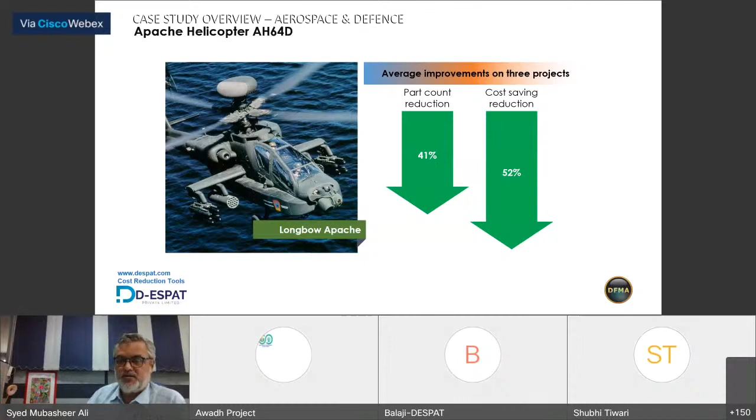Why would a company that already has a customer paying for their product invest in something new unless they see a potential to save? Because after the part is made, it has to undergo certification from the Federal Aviation Administration, military grade certifications, to make this product actually work in the hands of the customer. They will invest only if there's a potential to save.

So you need to have this mindset—you can't be a separate player just saying my engineering is good, I got 10% savings, I could do it in 2 hours now. That alone may not be an excellence criteria for a product like this. Does that make sense? Say yes in the chat box.

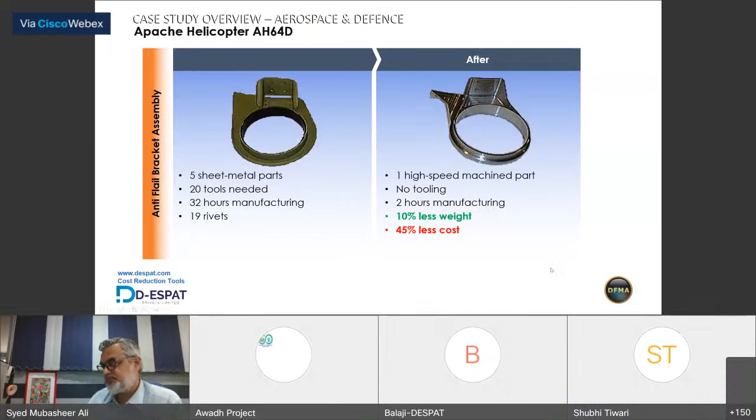Okay, there are many such case studies I have in the aerospace domain. I can share them tomorrow if you want, or we can share them with you. But that's the idea. From other domains like office equipment, companies like Dell which have serviceable items, they look at design for service. Like earlier today, we spoke about disassembly.

Yeah, you can use it, Mr. Tanzim, for Formula 1 student components. Even if you're making one prototype, you can use DFM to find out the best approach to getting that component made. You can do the DFM analysis and see: if you make one, how much; if you make 10, how much; if you make 100, how much—what makes the better choice.

No, we don't provide licenses to teams. Your institution will buy the license, and you can probably use that license of the software available at your institution.

So coming back to the presentation, Dell uses it for designing for service. Previously, it used to take a lot of time to access a small component on the motherboard. If you're able to see my screen—I'm just going to show it on my table. If I have to access this component, there's a big motherboard there. If I want to put a screwdriver under it, I can't. So I have to remove all of these 4 or 5 bolts along with the cables to move my component away. Only then can I access this motherboard.

When I put it back, it takes another 20 minutes. So Dell said, hey, in our assembly line we're taking 2 minutes to put this in—why is the engineer taking 25-30 minutes? They figured out he was spending more time removing and putting back an unnecessary bulky SMPS unit, so they came up with a design using a simple hinge design.

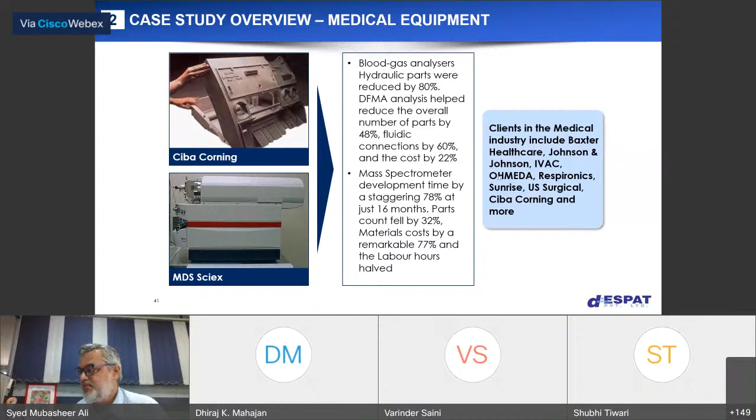Other customers from our domains have deployed DFMA from different industries including medical, automotive, and we have a number of case studies. Sometimes customers, like Harley Davidson here, want to benchmark or get features of their competitors. The sales team would give a capture of the competitor's design ideas and say, hey design team, this is a good feature the competitors have, if we also have it, it will probably be good for more sales. So rapidly, design teams would see whether that feature can be incorporated right away in the existing design, or should they explore it in subsequent futuristic designs.

These are some customers worldwide, and these are some customers in India that we have listed out here.

You take this 38 minutes and divide by 8.2, what do you get? Can somebody give me an answer? 4.63, 4.8, right? Which means in the same 8-hour shift, your operator is able to assemble 4.6 times more AC units compared to the previous design, without escalating salary, without escalating burden. You're getting 4.6 times more products assembled.

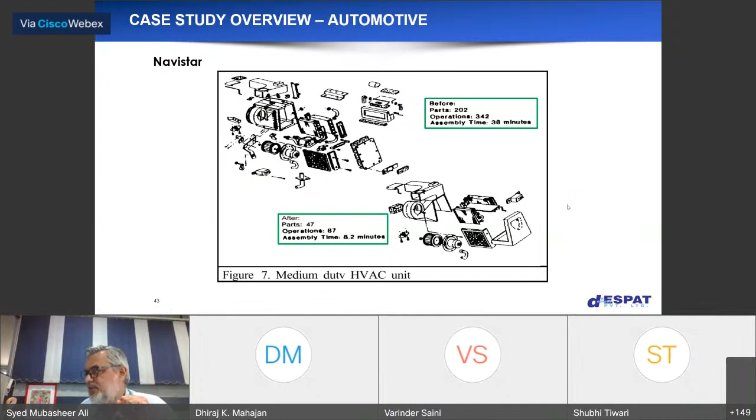I'll just end up in the next 5-10 minutes showing a few case studies from our customers, who I work very closely with. That's why it's listed here.

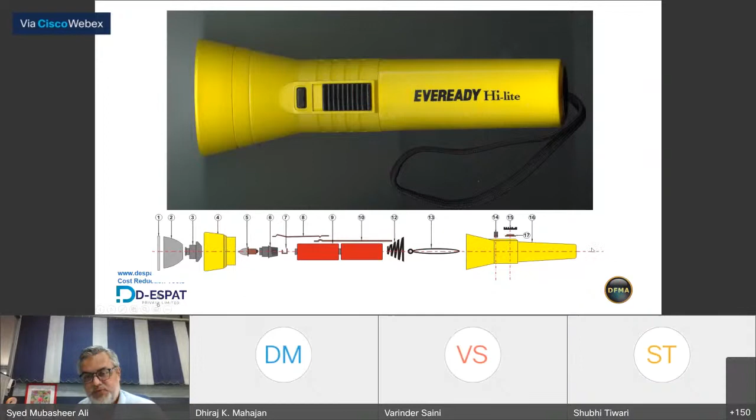Now there are 2 batteries that can drive 1 torchlight here. According to part count reduction, it would be good to have just 1 battery. But just because you want a simpler product, you can't go start a battery factory, correct? Let's say these 2 batteries cannot be changed because you definitely need 2 batteries to run this product. That, along with this, is the super system here—this battery and this torchlight, which is required for the function of this torchlight to work.

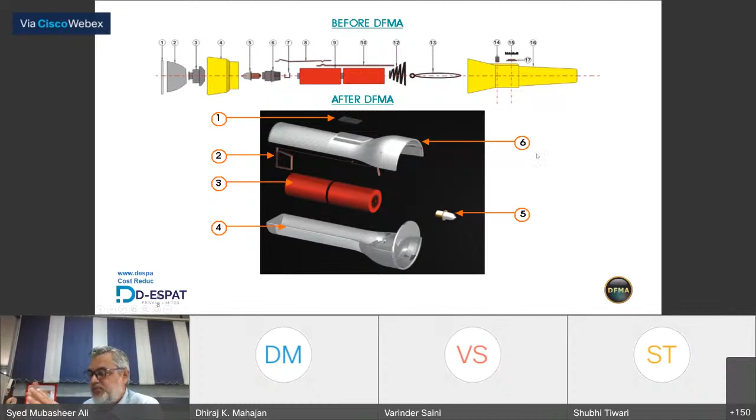This graduate team came out with an idea of simplifying the rest of the structure, so that from a 17-part design made by an OEM like Eveready, they could come out with a 6-part design, complete with mold drawings and so on. You need these 2 parts for the actual product to work. Ladies and gentlemen, I'm not saying let's go make cheap products—India should not be known for that. What I'm saying is there must be another way of doing things, and that's what this is trying to highlight.

Making sense? Another set of student projects I'd like to show as examples. Yes, it will take time—you will combine parts and it will take time—but once you have a combined part which is efficient, you make the product at much lower cost. That's the key to success.

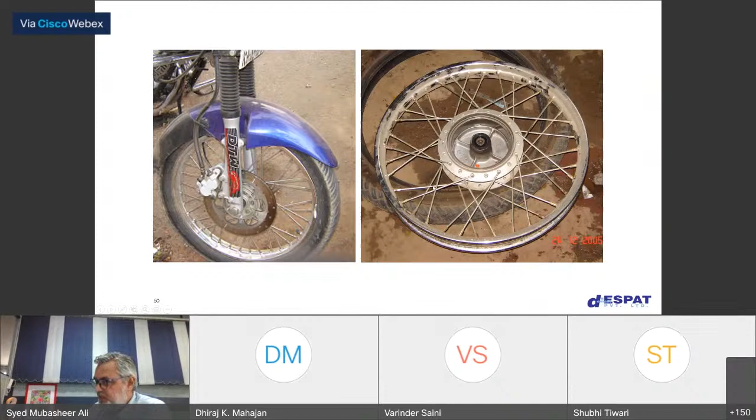Look at this component—this is a sub-assembly. Let's say you keep this brake assembly drum as a required functional component. Look at the number of parts here: there are 4 sets of spokes in batches of 9, so 9 fours are 36 spokes, 36 nuts, 36 washers, plus 1 rim.

Now I have a question for you. Have you seen this kind of wheel? If you have to assemble it, you need a truing tool to assemble and align the wheel to be perfect. Now compare this to a magnesium alloy wheel. My question to you, ladies and gentlemen, is: which of these 2 designs is more expensive to manufacture?

Tell me, is the spokes design expensive, or is the magnesium alloy expensive? Some of you are saying spokes, some are saying magnesium alloy.

But when you go to a showroom—if you go to a TVS showroom here in Chennai, and if I go there, the salesman says, here's a spokes wheel design, this bike is 30,000 rupees. The same bike with magnesium alloy wheels is 35,000 rupees. Why does he do that?

If I go, it's about appeal, exactly. If I go, like Abhishek says, he won't care what I buy.

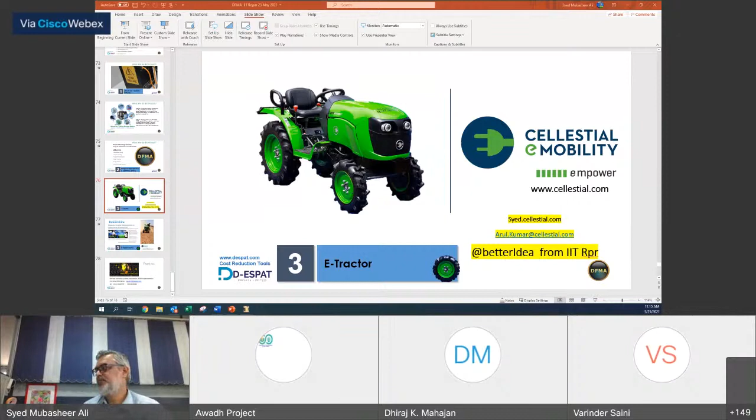Varinder, your voice is not audible. You're not audible. Am I audible now? Yeah, much better.